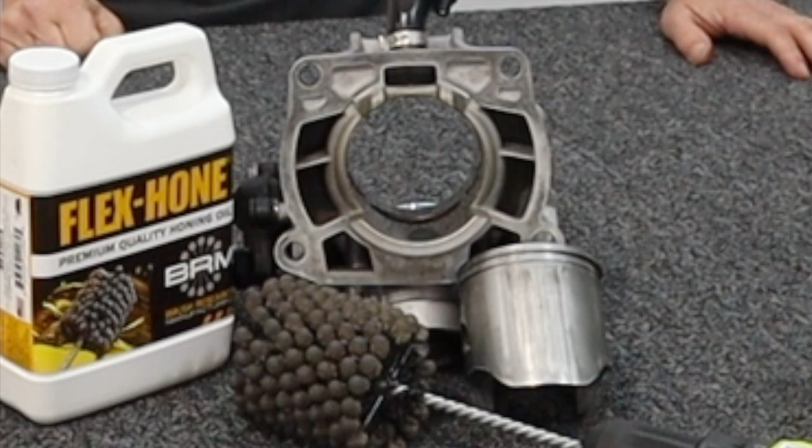Look at this piston, seized. Look at this cylinder, seized. So it's kind of and it's kind of not. That's Nelson from The Simpsons.

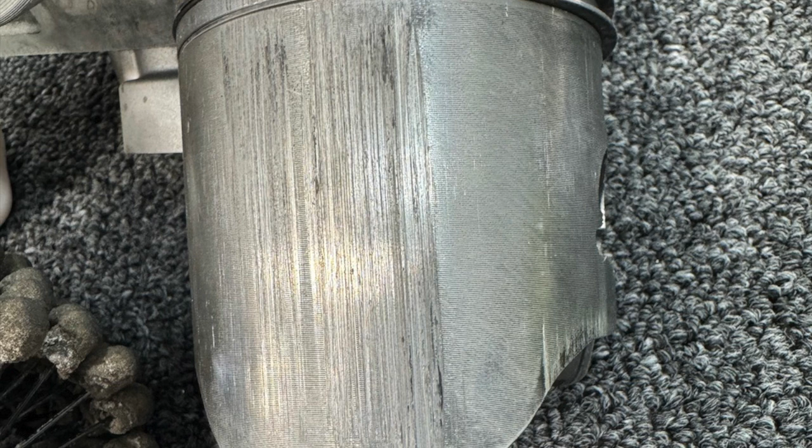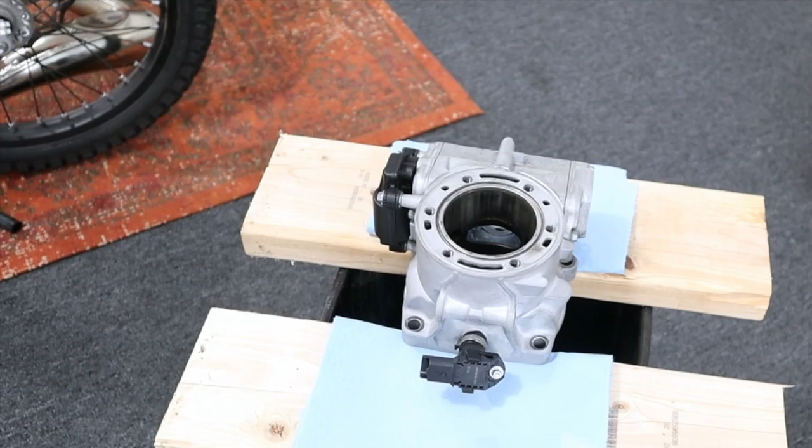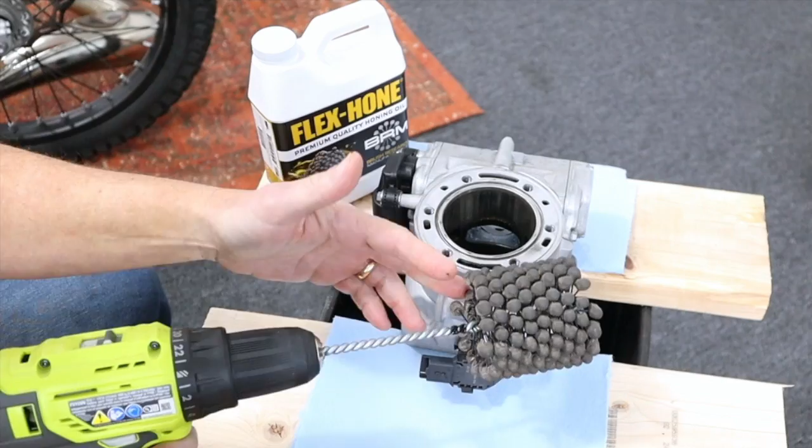And then I'm going to show you how I do the honing. So this is a simple way to do it. You can just use 2 pieces of board here, put them over your trash can. I like to run it up and down. I'm going to hone from the bottom to the top. 2 reasons: 1, any grit that might get in there wouldn't get stuck up here in the exhaust port, and 2, it's easier to start from the bottom than the top where the cylinder sticks out.

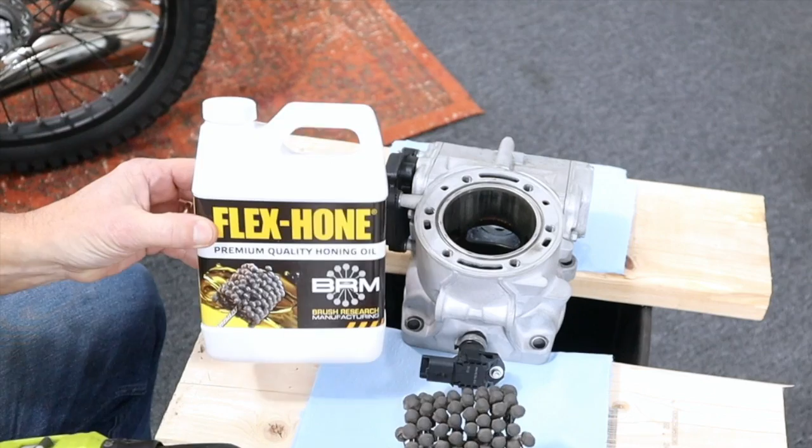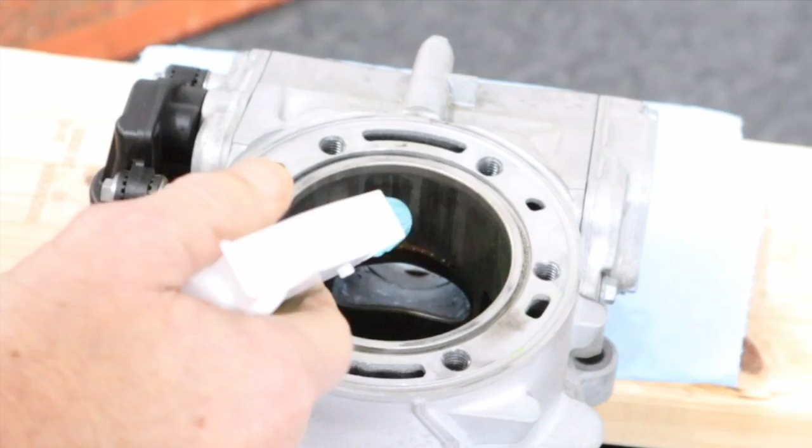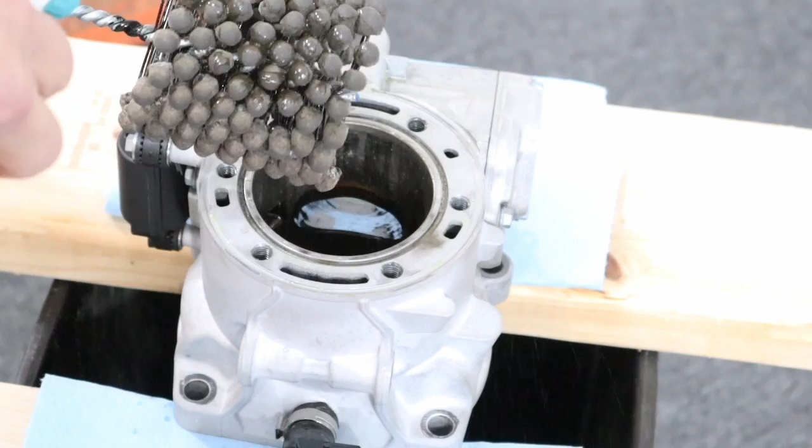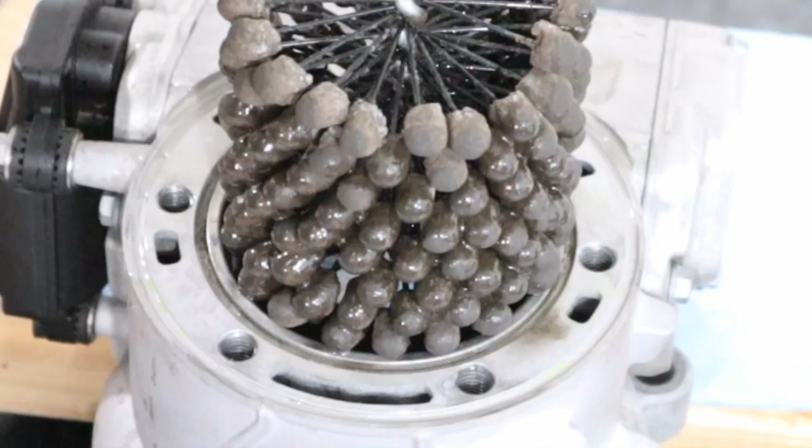Okay, now I'm going to hone. I put the oil in a spray bottle and I get everything there as well as I can. I don't really want the dry aspect of it. I also will get the hone just for fun. And we're just going to try to make a 45-degree crosshatch. You're going to try to gauge it to go up and down about as fast as this thing is turning, but it's just going to take a few strokes, pull it out, look at it, and see how it's going. You want to start it before it goes in.

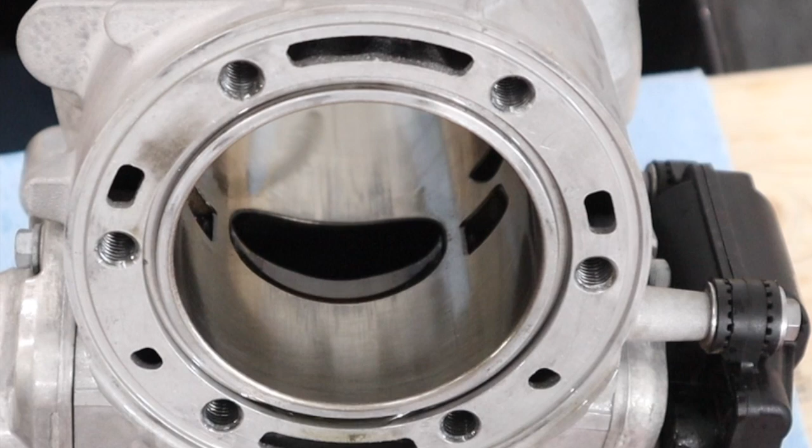Now let's look. I don't know how well this shows up on this camera, so here's a clearer picture that I took with the phone. And you can see that the crosshatch, I didn't go fast enough up and down. This is more like a 30-degree or 60-degree, but it's not a 45, which is kind of what we want. So I'm going to go at it again, and you can also see that it's not a gnarly hone by any means. It still has a long way to go to even take some of these scratches out. So if you're worried about taking all the Nikasil out, I wouldn't worry about it. Let me get back at it.

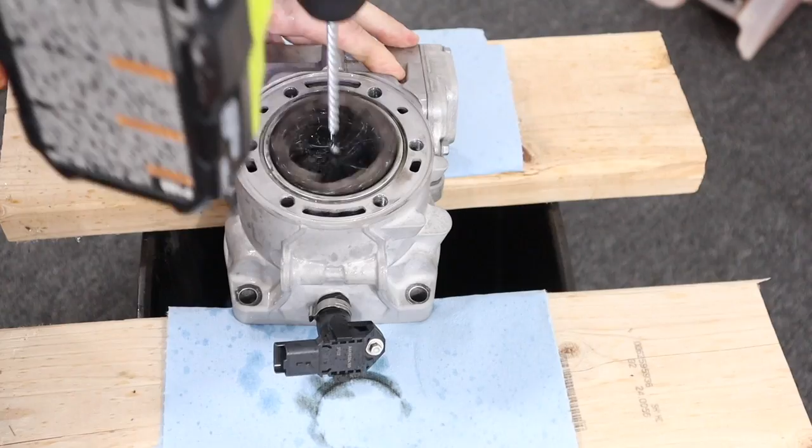Well, it worked out well, and I'm happy with it. I just cleaned it with carburetor cleaner, and then I washed it with the hot water and Dawn dishwashing liquid and blew it all out with the air, and it came out really well. Sometimes if you need to really see what's going on in there, use something like this: a magnifying glass with a light in it. If your eyes are a little wacky, you can really get a good idea of what's going on. Shine some light in there. See well. Take a look at these pictures here.

You can see the top, real nice. The rest of it, nice. The bottom down here, you still see a few scratches. No big deal, man. You rub your fingernail in there, and there's 0 catches. You can run a pick in there like this. You don't feel any kind of bumps. So you are good to go. Now dig these pictures.

So now what am I going to do? Now I'm going to size this Wossner piston that I use to the cylinder. Of course, I will cut the bottom, get the clearance here so it doesn't touch the crank. But these things really work best at 3/1000 clearance. A lot of people could go, oh, that's way too loose. Well, it's a different motor than before, and they run hot. And just like this guy, with it already being hot and adding the compression, that's what stuck it. You saw the heat seizure there.

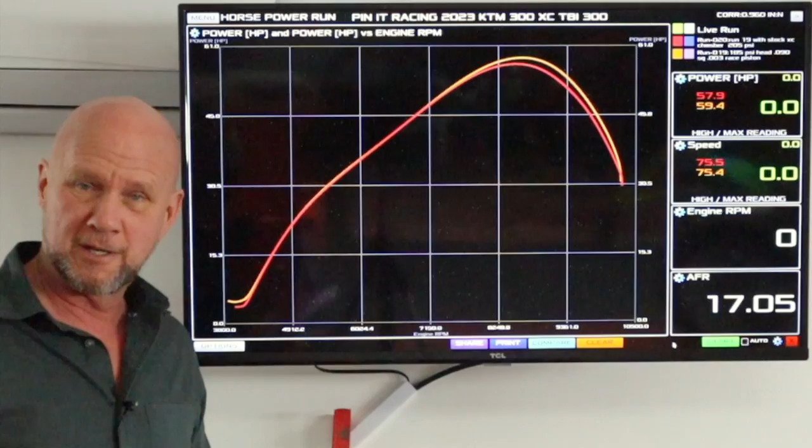So the best question is, did it work? Is this it? This actually isn't it, but we'll get to this in a second. Let's look at the dyno. This is it. Pretty good for a rebuild. With the Wossner piston, I sized it at 3 thousandths. I cut the intake side just a little bit more for a little bit more breathing. And this oil is at 40-1 instead of 60-1. Pretty good.

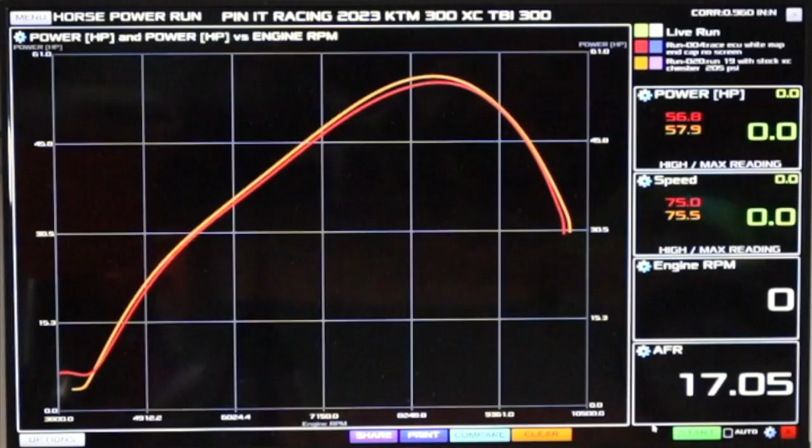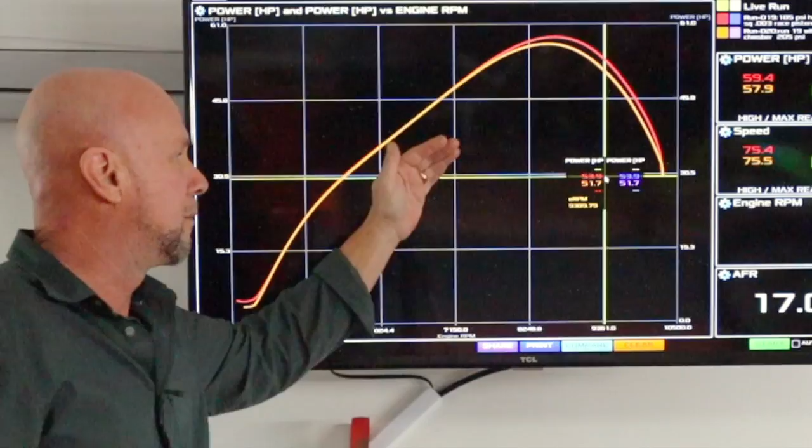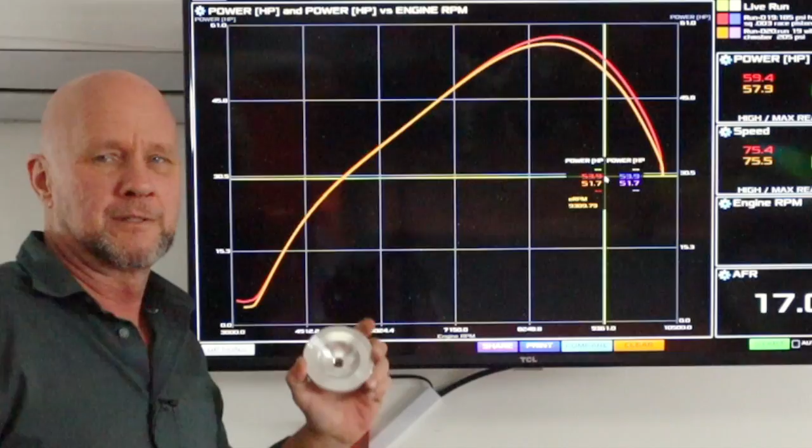So if this is just a simple rebuild, what was that other one with all that extra little top end? An almost free 2 horsepower all the way on top, no loss on the way up, and almost 2 down the backside. Just a simple, different combustion chamber that I've machined to lower the compression. Yeah, the compression's way too high in these things. This one took it from 205 to 185. That's the difference here, 185 to 205.